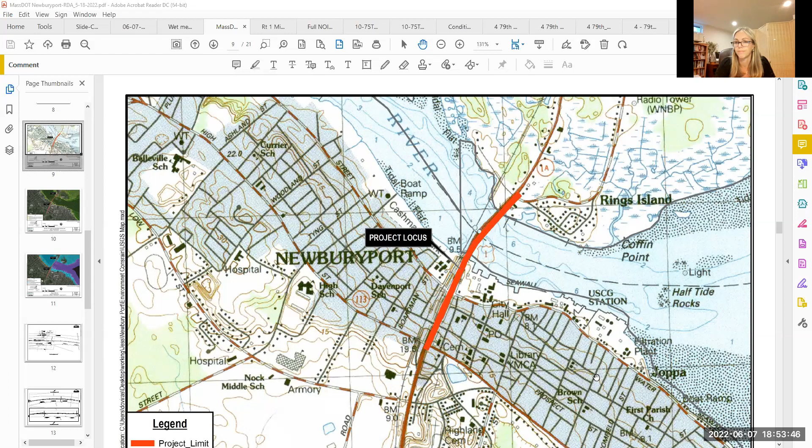So just to close, there's one portion on the Salisbury and one portion on the Newburyport side where we are proposing about 50 feet of a paved way that's currently a pervious surface. And again, that's to add connectivity to the existing shared use path to the proposed bike facility.

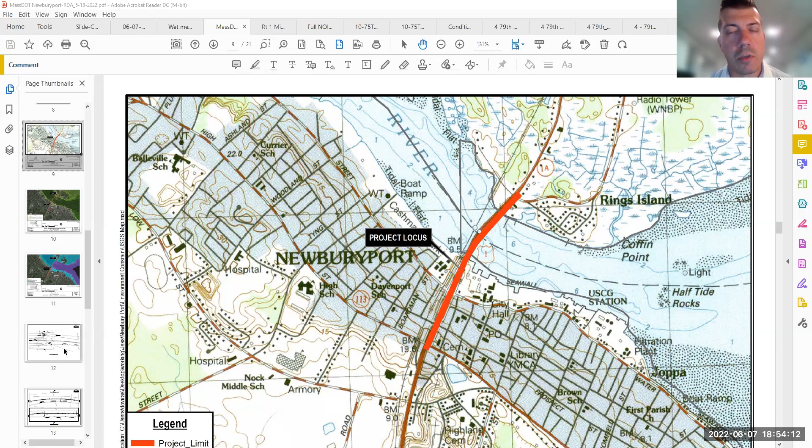Stephen, I can jump in here. Sorry that I had meant to present. I didn't realize we were going to start early. So I apologize about that.

I'm not sure if Stephen talked to you about this, but all the bicycle work is considered exempt under 310 CMR 10.02(2)(b) and the riverfront area regs 10.58(6)(b), except for the ramps that are going to come down off Route 1, and that work is not in bordering land subject to flooding, but it is in the riverfront area and in the buffer zone. It'll be on a grassy strip and join into an existing paved path. So the work will occur on an area that's currently grass, and erosion controls are proposed to prevent any sedimentation from leaving the work area.

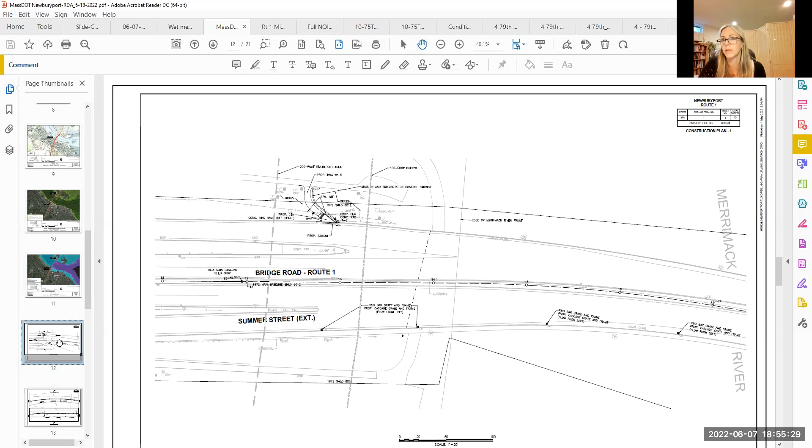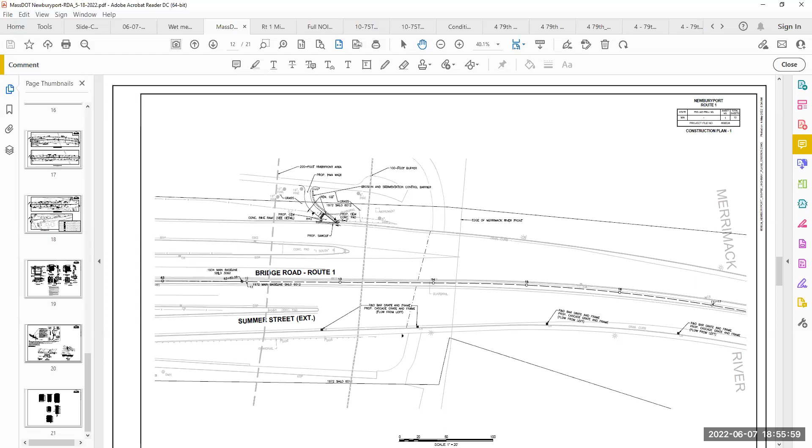Susan and Stephen, I've got all your plans and the RDA up here, but feel free to tell me to move to a different page or zoom in on anything. Well, you could scroll to the last page. It just shows the erosion control barrier. Maybe one down, Julia? Try 20. Yes, that one, exactly. So typically MassDOT uses compost filter tubes. They're a little bit easier to maneuver, and we've found that they work quite well in preventing any sediment from migrating.

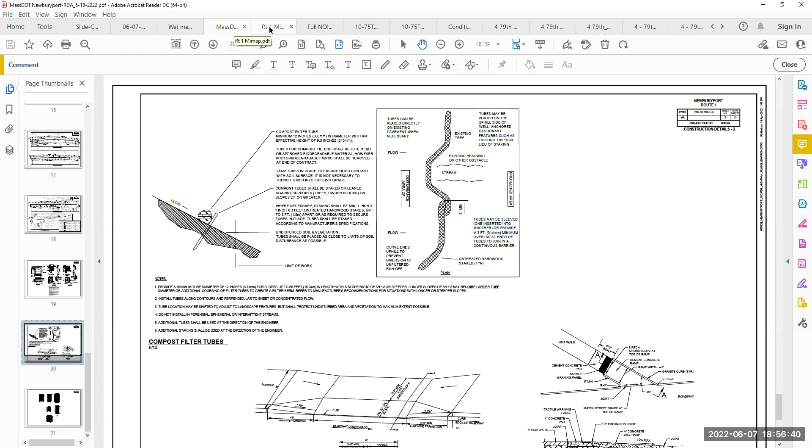And I think that's it. Stephen, did you want to add to when the project, you anticipate construction in the early fall? Yeah, at this point, the construction schedule's somewhat fluid. The program managing this work has several other locations that are scheduled. So it's really dependent on a number of things, but our best estimate at this point would be late summer, early fall.

And I forgot to add that the Merrimack is mapped as rare species habitat. That does extend onto the land a little bit. I believe the species is in the river, and they extended onto land just for added protection. But nevertheless, MassDOT has done a MESA checklist, and they're coordinating with Natural Heritage.

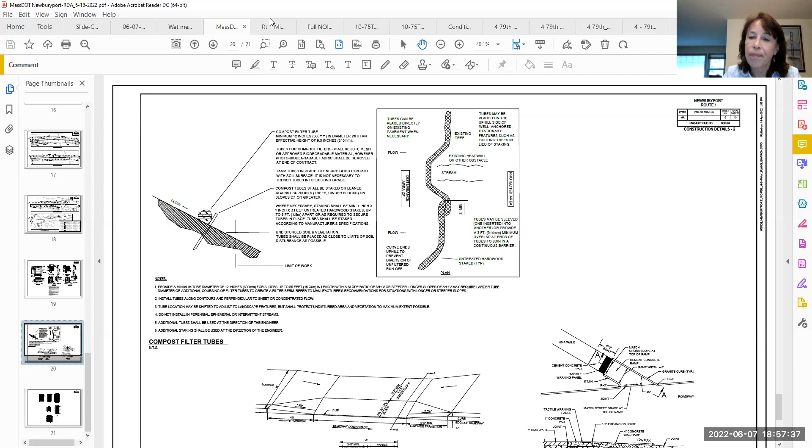Okay. Just for anyone who had a hard time with the plans and visualizing where exactly this ramp work is taking place, which I did, I pulled it up on my map as an aerial, so this might make it a little more clear. Correct me if I'm wrong, Stephen and Susan, the ramp from the bike lane onto the shared use path on land would be right around this area where these trees are shown. Is that correct? I think it's a little closer to that monument, closer to the water. Okay, so closer up here. Stephen, is that right? Yes, that's correct.

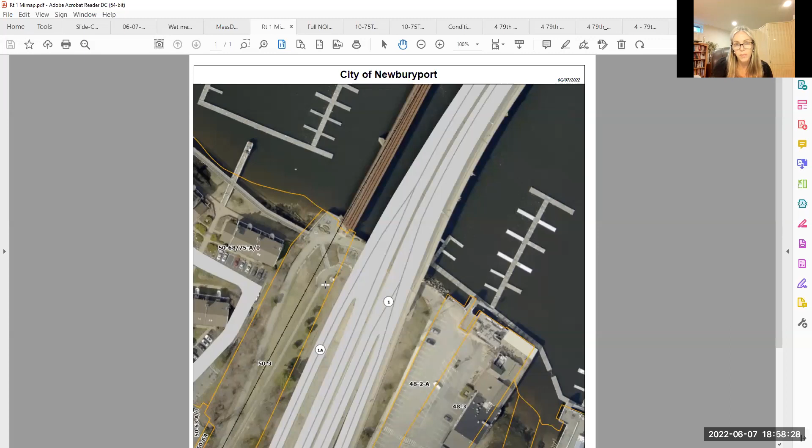Yeah, there will not be any impact to trees or removal of trees or anything along those lines. Okay, that's good to know, because on the project plans, it does look like you might have to impact the trees. Yeah, at this point, it's not anticipated.

So essentially, the Route 1 bridge is going to lose a lane on each side to traffic, right? So will traffic be merging before then? Just as a general user of the bridge, just asking.

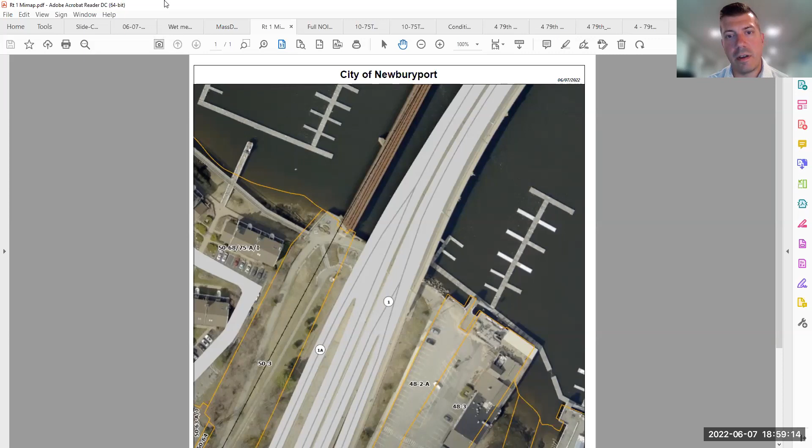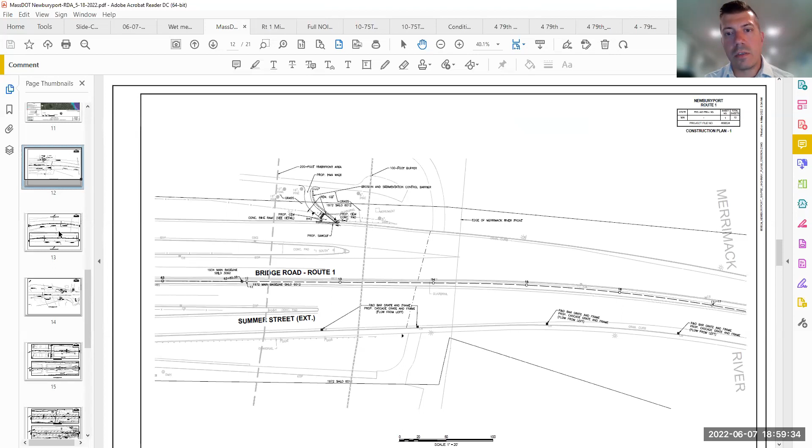Yeah, for sure. So the lane drop will begin the exit prior. So if you're traveling north, you have the Merrimack Street on and off ramp, and then prior to that, you have the Winter and Summer Street on and off ramp. So the lane drop as you're traveling northbound will occur at the Summer Street exit. The right lane will become an exit only lane.

The pavement markings will be modified back to that point, and there will be additional signage added, so it's clearly advertised it's an exit only lane. The left lane will be maintained as a travel lane. That one lane cross section will continue northbound, and then the bike lane will be picked up at the Merrimack Street on ramp, and then that travel lane and buffered bike lane will continue northbound into the Salisbury side.

Southbound, a similar setup. The one-lane cross-section, or travel lane rather, will continue to the Winter Street on-ramp. And one improvement that we're anticipating is where there is really minimal merging distance and lack of an acceleration lane for the Winter Street on-ramp. Because of the modification of that cross-section, that Winter Street on-ramp will now have its own dedicated lane where you will not be required to merge through traffic, and that two-lane cross-section will pick up traveling southbound.

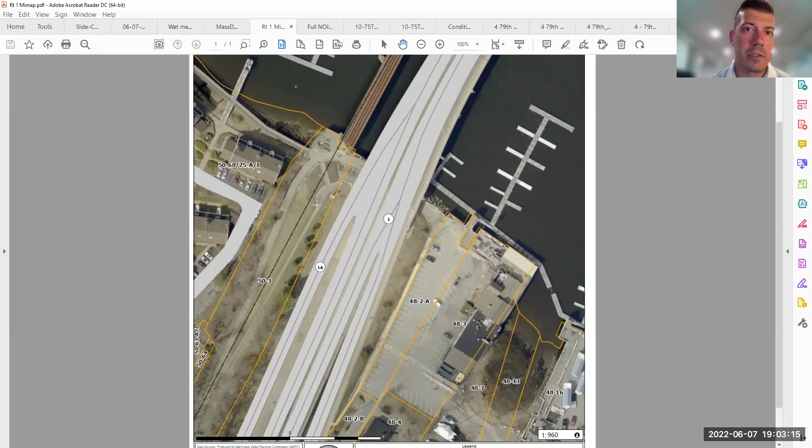Have you coordinated any of this with the Newburyport Parks Commission, or with Jordy Vining, the project manager for the rail trail? Seems like you're connecting right into the rail trail, and there might be some public accessibility issues to think about during construction. Yeah, Stephen, you can talk to that. Sure, I can speak to that. We've been in close coordination with Jordy from Newburyport and officials from Salisbury as well. We've solicited comments from both municipalities on the plans, incorporated the comments that we can, and have had an open dialogue. So yes, there has been coordination. Okay, great.

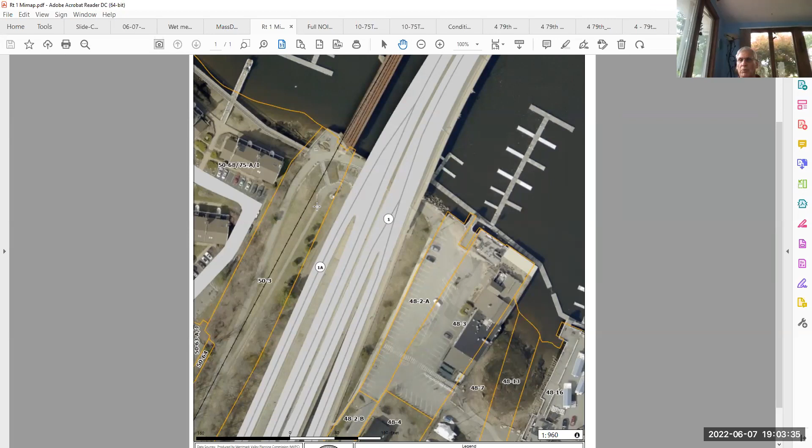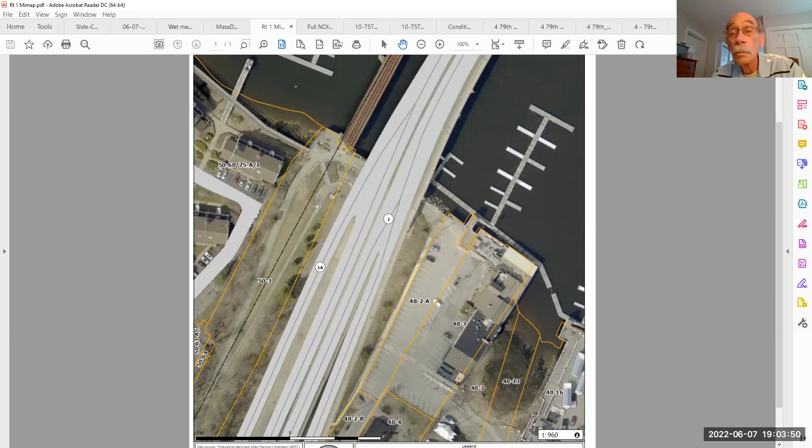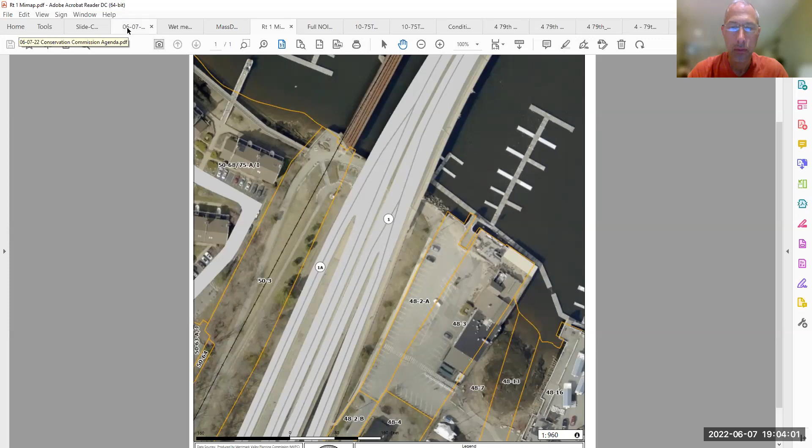Okay. Anybody else? No? Okay. Do we have a motion? Oh, public? No, this is a request for determination. Motion to issue a negative 2 determination. Second. All right, roll call. Paul Haley, yes. Dan Warshall, yes. David Vine, yes. And I vote yes. All right, thank you very much. Thanks, everyone. Okay, bye now.

Okay, can I get a motion to open the public hearings? So moved. Second. Roll call. Paul Haley, yes. Dan Warshall, yes. David Vine, yes. And I vote yes. First item is Raymond Kingman Jr., 10 75th Street, notice of intent.

Okay, let's see who we have here for this. Looks like we have Mr. Kingman, so I'll promote him to a panelist. It looks like we have Tom Hughes; I will also promote. And I don't know if Lisa Mead is here for this project or a later one. Lisa, you can raise your hand if you're involved. Good evening. Hi, Tom. Hi, Tom Hughes with Hughes Environmental Consulting.

After our last hearing, the commission had a couple questions, but basically we were waiting for DEP comments, and DEP commented that the house was riverfront, and we needed to address the riverfront standards. They also wanted some updates to the plans. This area has not been riverfront in 40 years, but it has become riverfront. So the house is in fact in the riverfront area. The mouth of the river extends further out, jetty to jetty.

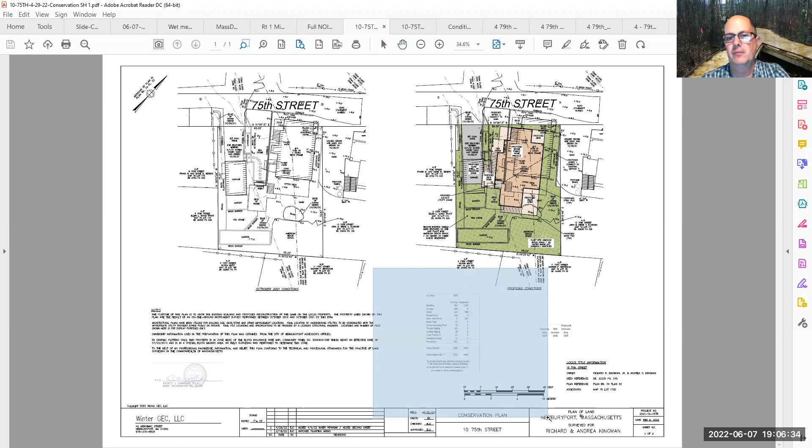So there's a couple things. One is we qualify under 10.58(5) as degraded riverfront. Currently, there is driveway, house, etc. And from the table, you can see we have a net reduction in degraded riverfront and a net increase in vegetation. So under 10.58(5) subsection F, we basically meet the minimum 1-to-1 standard. We exceed that, so we do comply with the riverfront standards.

The other thing DEP asked for was a clean version of the proposed plan without the existing conditions shown. That's the other one we sent in back at the end of April. These just hit the planning office at absolutely the wrong time when they were on a skeleton crew, so they didn't get out to you guys, which is why we ended up having to continue to this meeting rather than close out at the last one.

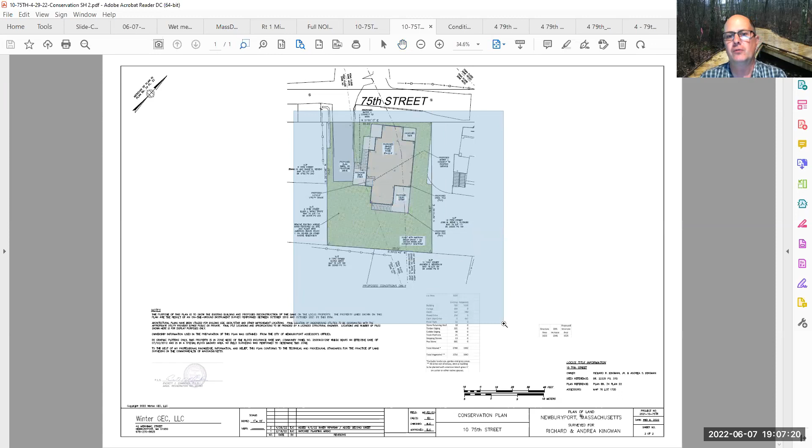So this is the clean proposal. It doesn't show any of the structures being removed or any of that. It just shows you, okay, here's what the site will look like when we're done. We have the driveway as far landward on the site as we can, to try to minimize any impact that the retreating shoreline may have on access in and out of the site.

Overall, I think we've been through this at the first hearing. It's a good proposal for a difficult area, and hopefully more of the remaining solid foundation structures go through this process. Mr. Kingman can correct me if I'm wrong, but my understanding is that as soon as this clears appeal periods, he does plan on pursuing the demolition of the structure. And then he's going to kind of wait out the Army Corps dredging and see how the situation plays out before doing the construction.

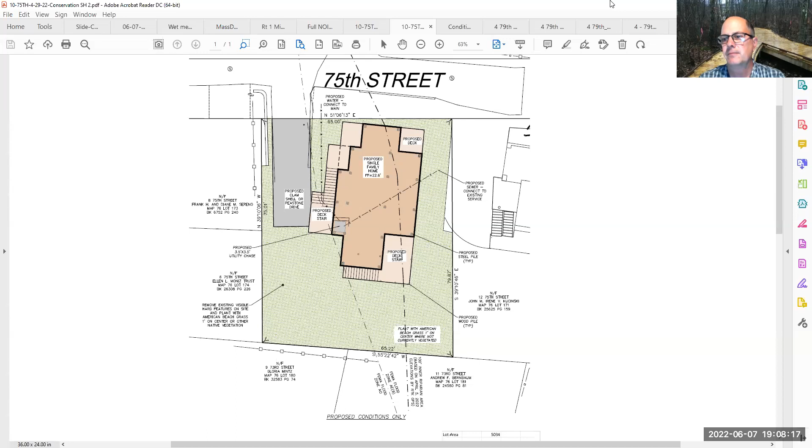Okay. Does the commission have any questions? Yeah, we've gone through this already.

So Tom, it will be all the outdoor space aside from the driveway will be planted. Yes, that's the current plan. I mean, we have enough unvegetated area that, it's possible, I suppose, we could come back later and try to amend it and throw in like a clamshell patio or something. But for now, this is what we're proposing.

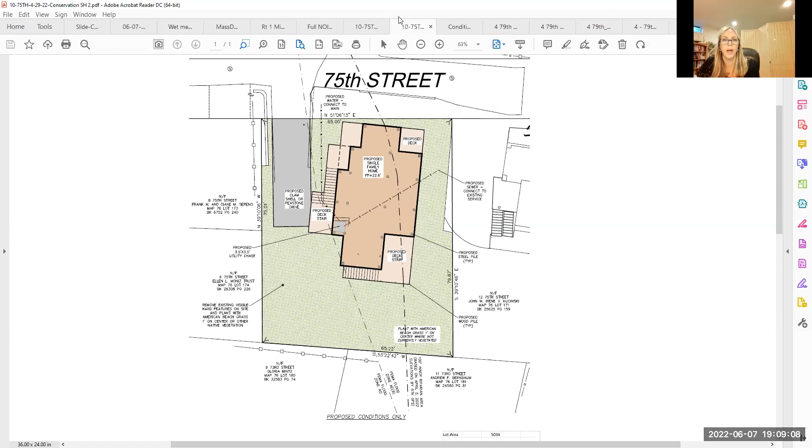And correct me if I'm wrong, can we go back to the other plans real quick? If you look at the bottom while you're right there, let me go back. If you look, you can see we're increasing vegetation on site by about 790 square feet.

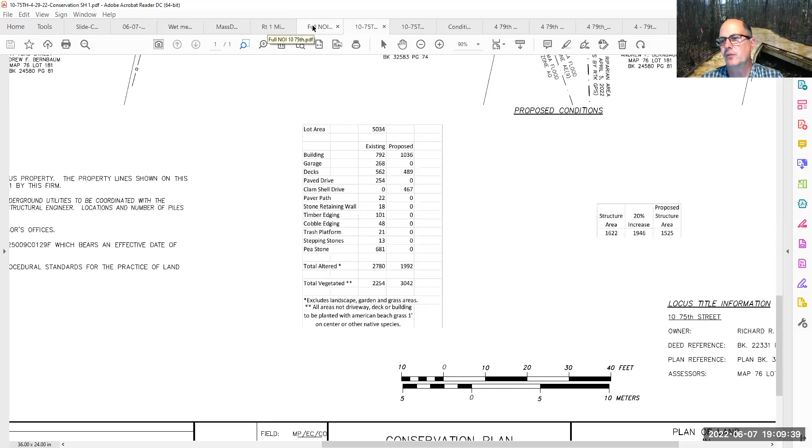So that's why we have plenty of room later if things settle down out there and it makes sense to do some outdoor space. Right now, it just doesn't with the dynamic dune situation out there. If you build a patio, it's just going to be under sand. Might as well get it all planted as well as you can.

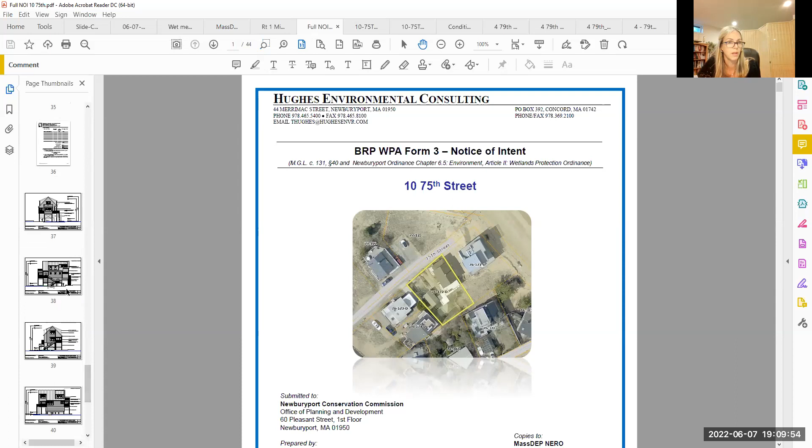Right, so my question was about the utilities and where they're going to be, the platform and that storage area. I just want to go back and review that on the elevation drawings. Because the neighbors, you remember we put their propane up elevated, and it's been important that it was. Where is that all going to be on here?

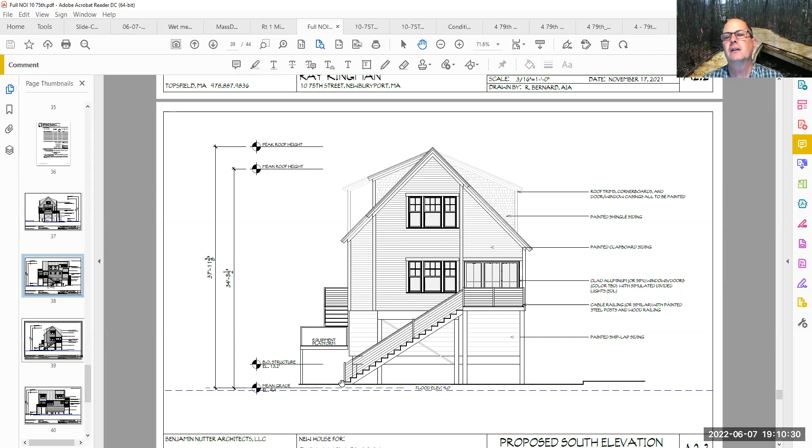So now you're stretching my memory. If you look, there's a mechanical space elevated up 4 and so many feet. There's an equipment platform there, which would be for compressor type things. If you look at the next slide, you can see there's an access to the mechanical area, which is shown at 4 feet, 4 2/3, or 4 3/8, 2 3/8 feet up.

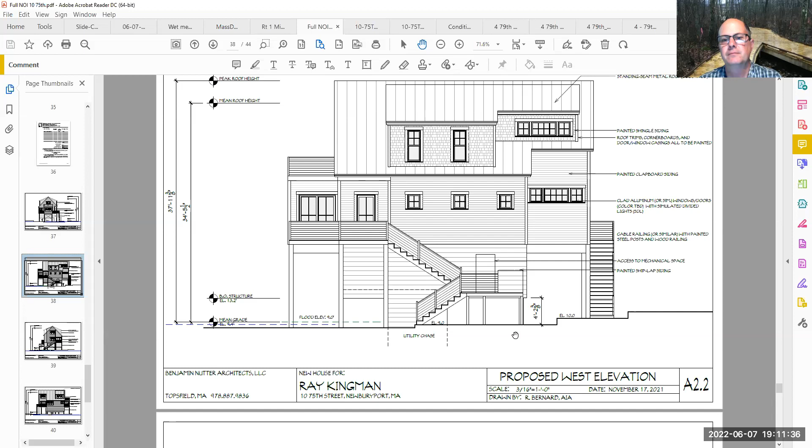Okay. Anybody got anything else? Hearing none. Anybody from the public want to speak to this?

Raise your hand. We will promote you. I am not seeing any raised hands. So what would we like to do?

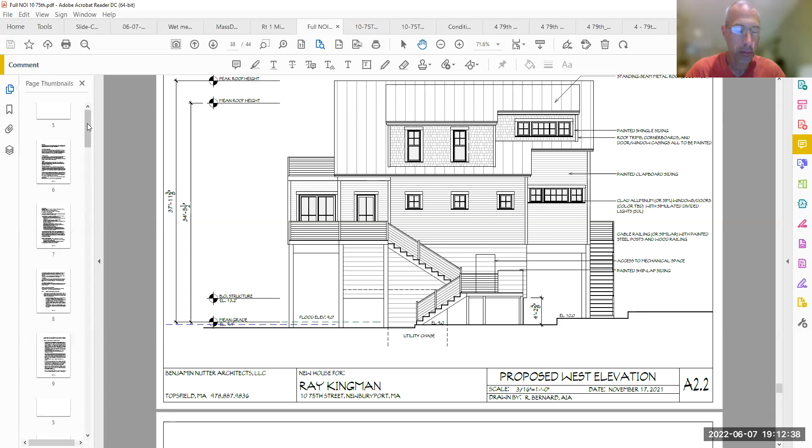Motion to close the hearing? Second. Okay, roll call, Paul Healy. Yes. Dan Warshaw, yes. David Vine, yes, and I vote yes. All right, thank you, thank you.

Next item is Robin Wallace, 4 79th Street, notice of intent. Okay, let me pull that one up.

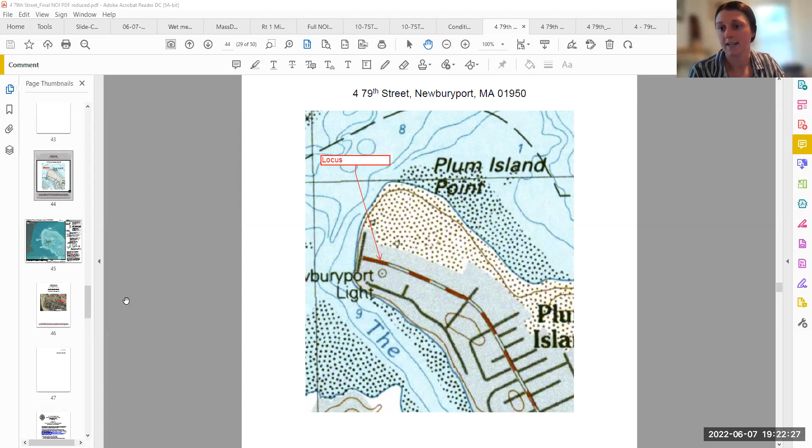Thank you, Attorney Mead. Devin Morris here from Hancock Associates, Project Wetland Scientist and Manager on the project you have before you today. It's nice to meet you all. We submitted this notice of intent to permit the redevelopment of the existing family home, which is a 2-story residence with an attic built in about 1947. Julia, if you could please pull up the plans, that would be phenomenal.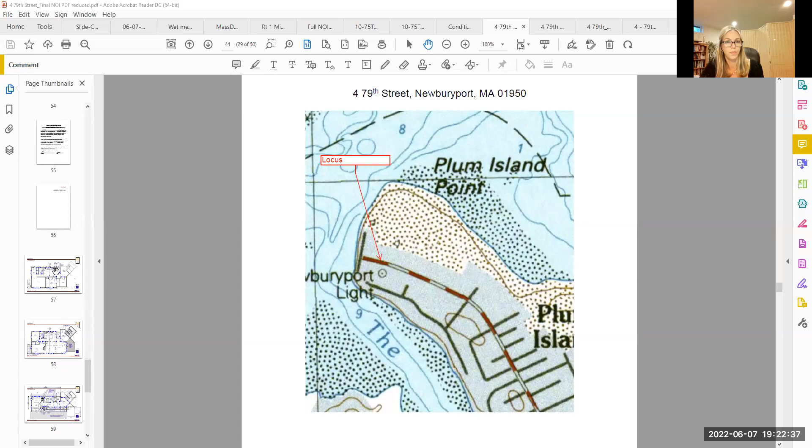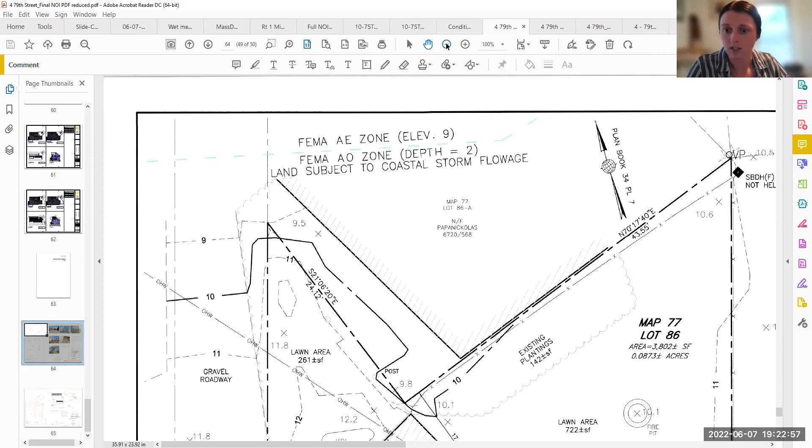While she does that, I'll go through existing conditions on site, which I'm sure you're all familiar with. Let's go to our existing conditions plan set, which also has photographs as well. Hoping that those came out clear for everyone to get a better understanding as to where we're at. Great, thank you, Julia.

So we are on a barrier beach, coastal dune associated with barrier beach, and land subject to coastal storm flowage associated with the flood zone mapped AO at a depth of about 2 feet. The FEMA flood zone lies between an AE zone and a VE zone. Located on Plum Island, barrier beach with densely developed portion of the dune system off Northern Boulevard.

Since the project is located on a barrier beach landward of the coastal beach, it must meet the performance standards under the Act, 310 CMR 10.28 and 10.29, and also the Newburyport Wetlands Ordinance. So the existing 174 square foot deck on the northern portion of the property that is currently over bituminous concrete will be removed for the proposed 134 square foot impervious addition for an elevator shaft.

Devin, is that in this area right in here? That is correct. Yep. Okay. Thank you. Yeah, I forget I don't have control, so I can't move my cursor.

So the existing first and second story deck and steps are going to remain in place. Adjacent to the existing shed is a koi pond, so just up a little bit on the right. Yep, exactly. Perfect. That's also going to remain in place.

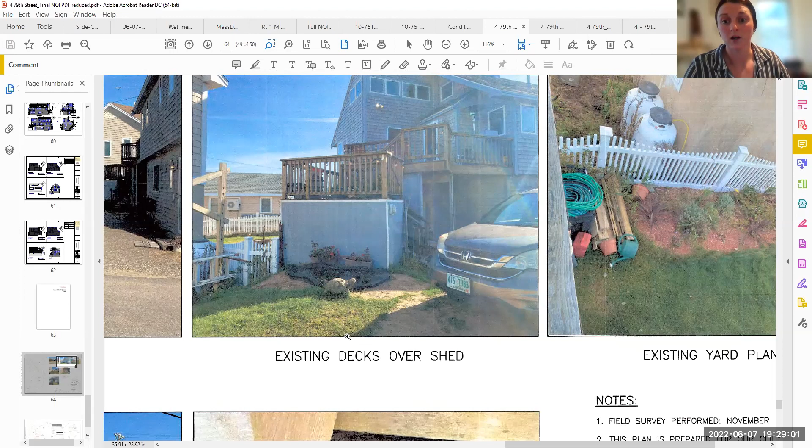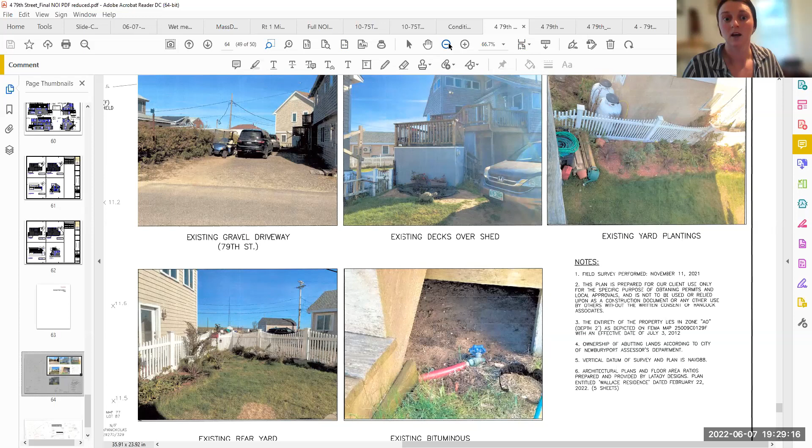So Barrier Beach, we go through a lot of the performance standards of the Act, and then also our compliance specifically with the AO zone, which I think was a large one that we had some questions about. The AO zone, which is represented as shallow standing water, is the result of the abutting VE and AE zones, whereas the velocity zones are the driver for the existing floodplain here. It's kind of a funky area. So we're not specifically in a V zone on site today.

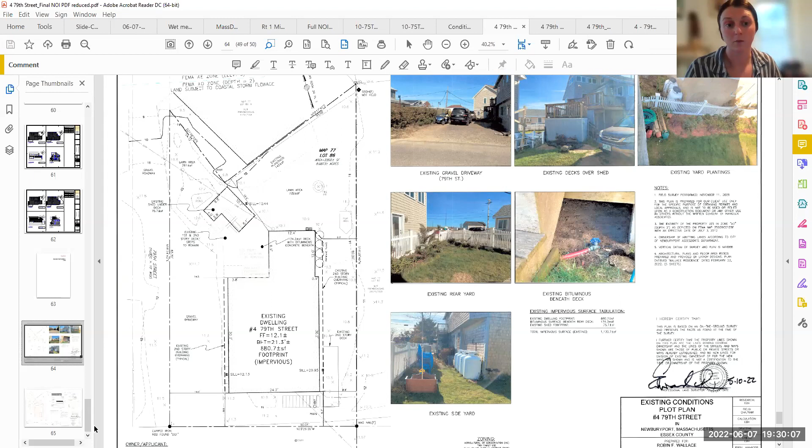Land subject to coastal storm flowage: under the Act, there are no set performance standards, but under the local ordinance 6.528 subsection B, we do want to run through how the applicant is complying with these performance standards. There are no structures or paving of new roads, driveways, parking lots, or proposed coastal engineering structures here. We're not within Natural Heritage endangered species or protected wildlife habitat as well.

And our main focus is to add the elevator for the applicant here. So with that being said, I'm sure there's going to be more questions in regards to the resource areas, but I'd like to hand it over for time's sake to Attorney Mead so she can go through our variance and alternatives, and I'll take it away at the end for mitigation.

Thank you, Devin. And so what I'd like to do is go through, and I submitted all of this in writing, so I'm going to briefly go through the ADA and FHA standards, but then in the alternative, I will set forth that we do meet the variance standards, I believe, and we have provided a thorough analysis of that along with the 25-50% analysis. So under the ADA, there's a 3-step determination to see whether or not the ADA overrides or allows the waiver of local ordinances, bylaws, or regulations.

And one is whether or not there's a disability, and then 2 is whether or not the accommodation sought is reasonable and necessary. And in this instance, we believe the accommodation is twofold. 1, to allow the installation of the elevator, without which the applicant could not access the property. And 2, to allow the construction of living space that would allow appropriate disability access and living space to meet the accommodated needs. We believe that the additional square feet of 93 square feet over the 25%, which I'm going to go into in detail, is a reasonable accommodation in this regard.

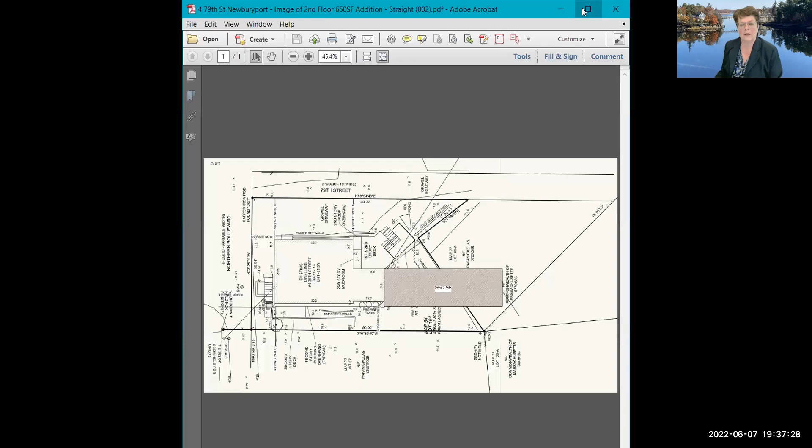Hold on, let me just make it bigger. Yeah, so this is actually an earlier one. We actually reduced it to 560 square feet, but it still does the same thing. So if you add the 560 square feet that are necessary onto the second floor, it actually doesn't fit on the lot. So it's not quite as long as this, but it goes into the second lot.

And then if you do it in a different configuration, do you have the other configuration, Devin? I think this is the only one I have. So the other configuration kind of filled in that corner there where it says first and second story deck, but it still went over into the second lot that's next door to this house. So the alternatives of putting it on the second floor don't work.

But in addition to that, putting it on the second floor would actually be worse as far as the commission is concerned, because it would add pilings where none are currently necessary, and it would cover a vegetated area, whether it's grass or not, it's still vegetated area, and it would not be a more beneficial alternative than the proposed alternative to renovate the existing third floor space in the existing footprint.

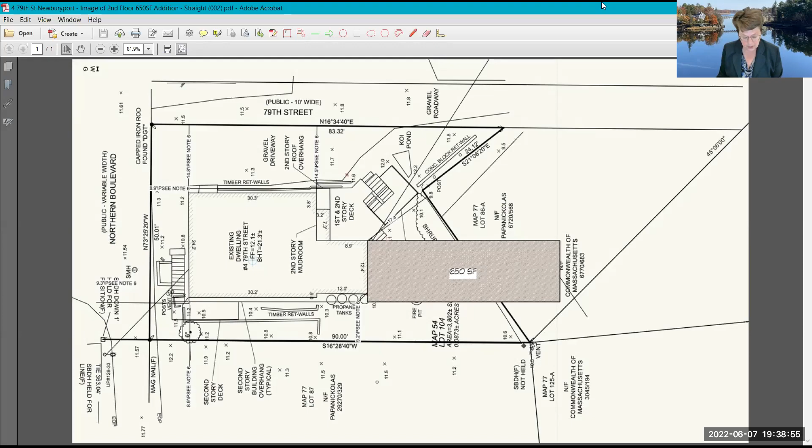So what are the mitigation measures? As Devin indicated earlier, she is proposing compensatory mitigation by adding additional native vegetation in the resource area. We provided 142 square feet. She's provided an extensive list in our filing and on the plans of what the proposed vegetation would be in that area, which would be native vegetation, which currently, as she said earlier, doesn't exist at all on the property. Thank you. Yeah, so 142 square feet.

So I chose some species that all of you are, I'm sure, familiar with. Salt tolerant pollinator species, bearberry, Virginia rose, beach pea, New Jersey tea, and then some American beach grass, I think would be appropriate here. I think it would really benefit the lot.

And in regards to our mitigation effort, we are looking at a net loss of 39.5 proposed impervious surface tabulation. So we are exceeding that required 1-to-1 mitigation, but more than that, 2-to-1.

So then the question, the last part of the variance requirement, is what is the overriding public interest? Here, there's an overriding public interest in allowing a person with disabilities to access and live in their home and enjoy their residence the same as those without disabilities.

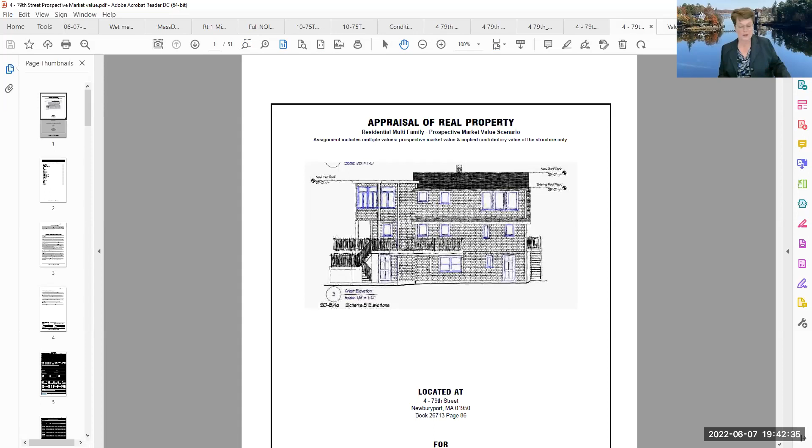Okay, where is the variance documentation? Is it somewhere in the 6 files that we have right now? I filed the variance documentation on Monday of last week in a cover letter dated May 31st, 2022, signed by both Devin and myself. And attached to it was the appraisal as well as Devin's updated plans. It's part of the appraisal package? Yeah, the cover letter is on top of the appraisal, but yes.

Yeah, in future, for Hancock's edification, we need these plans in one file, not in 6 files like we have now. Because I have no idea where any of this stuff has been put. So we filed it, Mr. Chair, a week ago Monday, and it's dated May 31st, in hand to you. And Devin also sent it in electronically with Mr. Story's appraisal and the certification that Julia reminded me about.

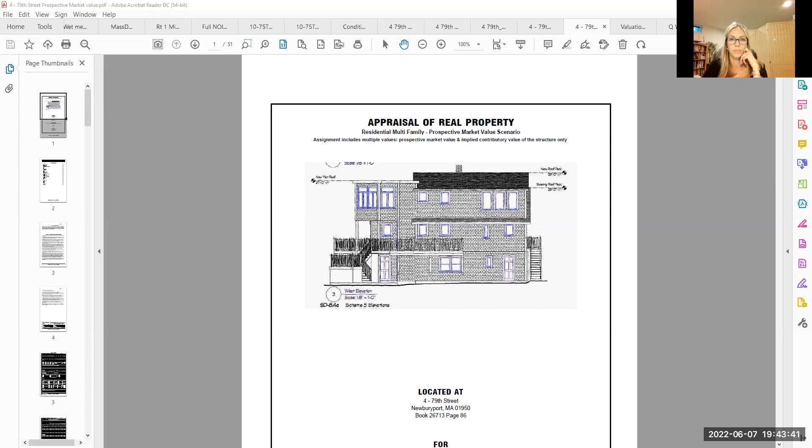Yeah, I'm looking for it. For some reason it's not coming up as attached. Yeah, I have a 5/31/22 final permit plans, but this might be it. There it is. Yep. So all the variance information is starting on page 4 of that final permit plan.

Right here. So here's where I would like to say, I think the crux of what you're asking is in this variance request. And I think it's important that the commission has time to read this. Has anyone else not seen this? David and Paul and Dan, have you guys read through this? I have not. Because these are the questions that need to be answered before I think the commission can make a decision on the variance as to whether or not these arguments are legally something the commission can go along with.

We haven't dealt, and I apologize, Lisa, and to the applicant, we haven't done this before. We've had one variance, I think in my memory, and that's been 10 years, associated with an ADA issue. And that was for an entryway at grade to get into an existing single family home. So it was to construct a new entry at grade. That was the accessibility, and the variance was granted for that at grade entry. This is a lot different than that.

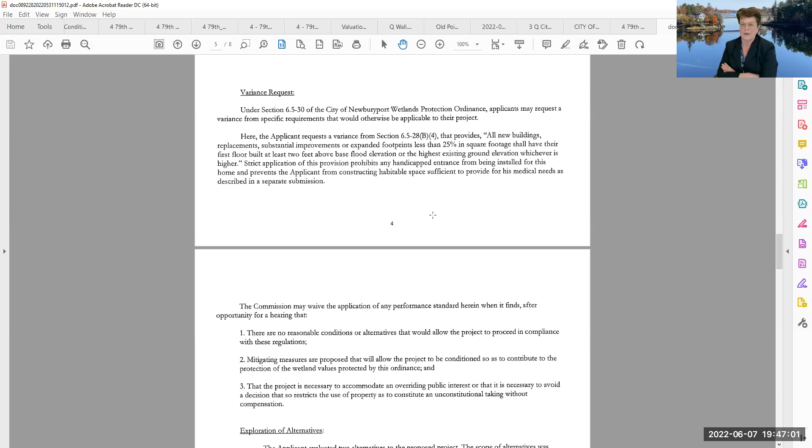So, first of all, I'm concerned that the commission didn't read the material. So it was 3 days later than the deadline. No, it was a week. No, I'm sorry. It was a week and 3 days later, Lisa. Okay. Yeah. So I am a little concerned about that. Time is of the essence here. And as I said earlier, both the ADA and FHA talk about delay. Now, I know that this is our only first hearing with the commission, right? So I get that.

But these are important issues, certainly for the commission to consider. But our variance requests essentially amount to 30 square feet. Well, in total, it's 93 square feet over the 25%, of which 63 square feet is attributable to the elevator and the construction of the elevator lobby entry area. So I'm not asking for a variance on the 25% that's 1,000 square feet or 500 square feet or even 100 square feet, quite frankly.

The other one is to allow the solid walls, if you will, of the elevator to be constructed at grade. And of course it has to meet the building code without question. This will be a pitless elevator. It will be lifted from the top. That is not an unusual construction methodology in someplace like Plum Island. So I understand that it's unusual, and quite frankly, thank God these requests are unusual, right? For a whole host of reasons.

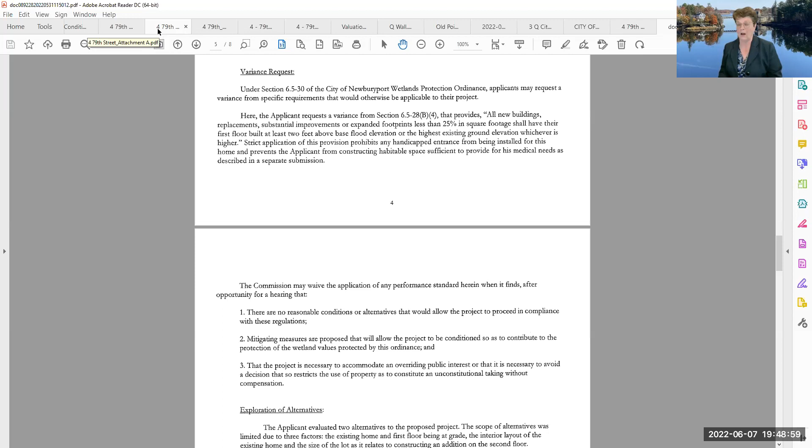And so I would actually like to hear a discussion from the commission. I think that if you would have read the material, you would understand the obligations of the commission, and even without those obligations under federal law, how we meet the variance requests. So I'd like to hear that. I'd like to hear any questions that the commission has, because I don't want to come back here in 2 weeks if we have to come back in 2 weeks, which I think is your schedule, right? 2 weeks. The 21st. Right.

So I don't want to come back in 2 weeks and have more questions. We can go an additional 2 weeks. So if we go 2 weeks, we're still within the appeal period of the ZBA, right? So we're not losing time. I'm capitulating, Julia, but I'm trying to get some buy-in here that we need to have folks look at this and ask questions and let us know what you need.

I just want to point out that the fact is, though, that if they haven't read this, it was a week and 3 days late, not 3 days late. It was over a week past the deadline. And we typically don't even open a hearing when we don't get all the required information by the deadline. So I don't appreciate the commissioners being told that they are somehow at fault for not having read through all of these detailed things that have come in late, including a revised set of plans. So let's just put that aside. Yeah. And I didn't mean to imply that, and I apologize if that's the way it came across.

Okay, we've been working with it for a while. So anyway, one thing I want to clear up here. I don't see a variance request anywhere in these 6 files that are available on the city website. I don't have a variance request. Julia just put it up. I know, but to read myself. Okay, and those are my files that, when you send it to me by email, I copy it into our file folder on the city's drive. And from there, it gets uploaded to the website.

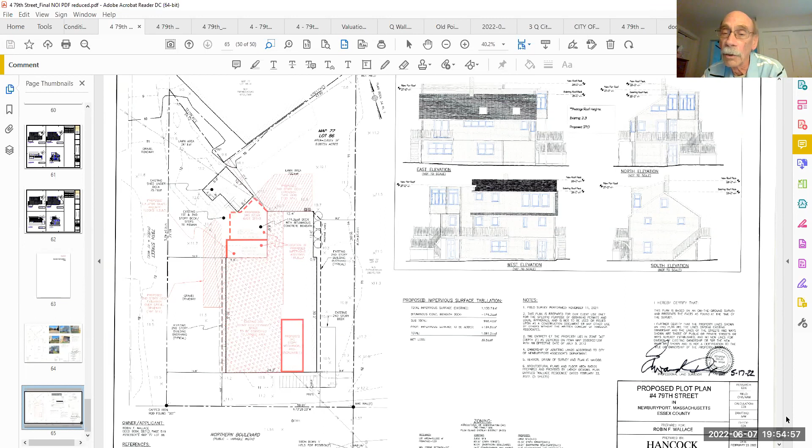Thank you. What about Dan, maybe? I'm not so sure that I find the public benefit in adhering to a federal law. I think they're two separate issues, public benefit and adhering to federal law. Now, if this is exempt from local ordinances because of ADA, then we don't need to issue an exemption.

Well, Dan, that's a really interesting point, because that was our position as well, that federal law allows the city to waive the local ordinances and regulations. There is mixed case law to say that you get that waiver from the regulatory authority, but it's a waiver based upon having a disability and whether the accommodation requested is reasonable and necessary. We only argued the variance request in the alternative because we were asked to, and I'm really trying to get this done for obvious reasons. So I put forward the argument, but it's our position that federal law allows a waiver of these local regulations, and in this instance they are reasonable. We're not talking about, to David or Paul's comment, I can't remember who made it, a huge lift here, so to speak. So that's our position, that we don't need a variance actually, but in the event you want us to go through that process, we think we meet the variance criteria. And it was the variance criteria, to Julia's earlier point, on your prior variance for access.

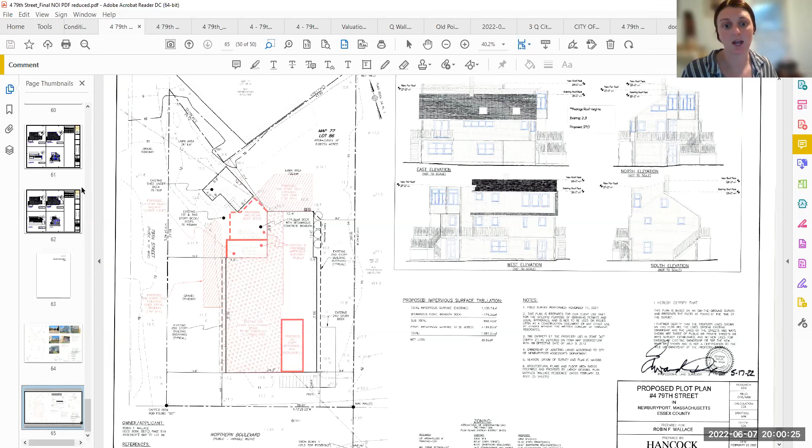And just to note, on Hancock's side of the plans, if there's anything else the commission wants to see, we'd love to just revise one set and get that to you, and hope to get an approval and issuance on an order of conditions on the 21st.

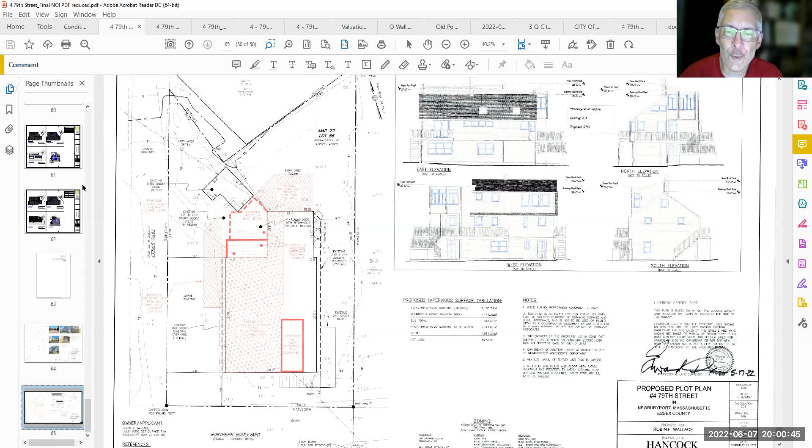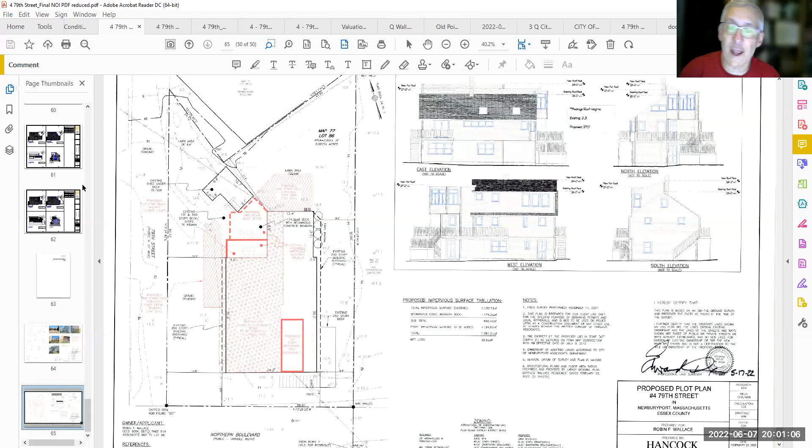One question I had - would it be possible to show graphically in the drawing where the actual shaft is? I'm seeing windows and a door and all that. Am I missing something where it shows the shaft in that east elevation on the left side there?

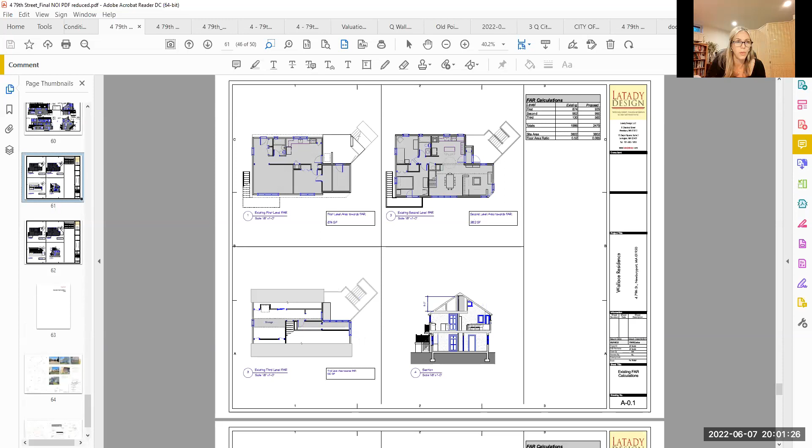I'd like you to look at the - Julia, do you have the full elevations, not just the ones on the site plan? Yes. I don't know which - hang on a second, because I don't want you to go up to the... those are existing conditions. No, could you get off that plan please? Could you move - can you move off that plan? Sure, thank you.

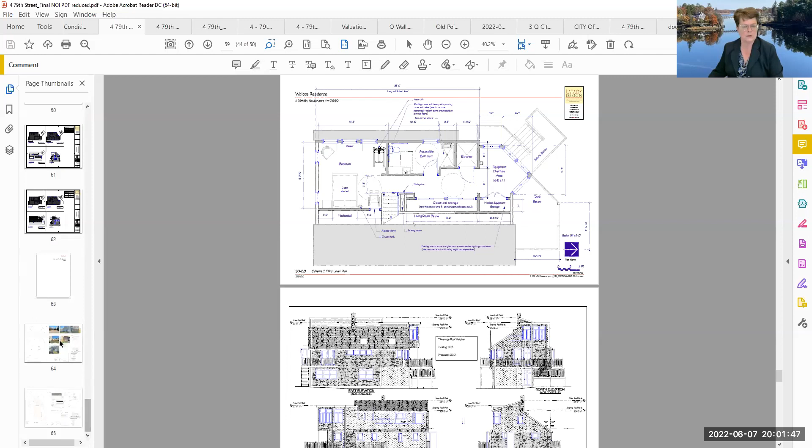That was in the private file that I sent to you. Oh, I'm sorry, that's all right. So in the site plan, in the floor plans that we originally filed with you, Joe, and in the elevations, it shows exactly where the elevator is.

In the floor plan - is there a plan that I can show? Hang on, the floor plans were the first plans at the top. No, I see the floor plans, I just wanted to see in relation to the rest of the building from an elevation, side shot - like where on here is the elevator? Do you have the elevations that were originally filed with these plans, not the floor plans, that were originally filed, not this revised set, but the old set of plans.

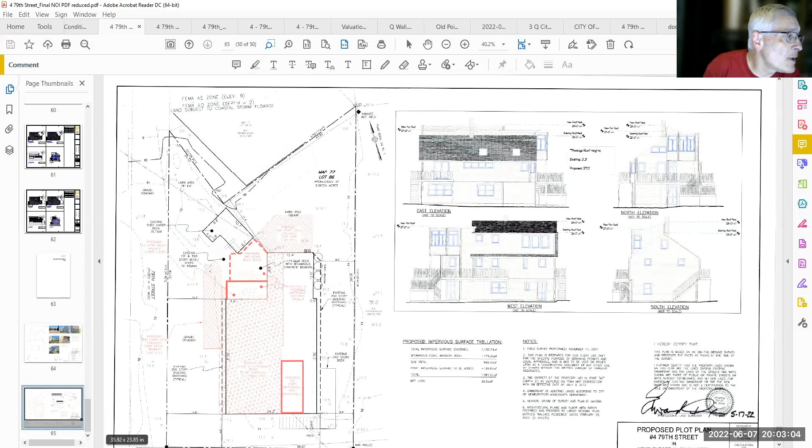Yeah, there's a set of elevations that are not on the site plan - they're the architectural plans, correct Lisa? Yes, not these though. There we go, or is it these? Yes, right, that's what I'm looking at right now. So you see on the bottom west elevation here, number 3, you see the door? Yeah, the elevator runs right up there.

So it's actually, I think you go in and take a right and it's right there. There you go. That's it, it's right there. Yeah, yep, I think that's correct.

It would be nice if we could make that clear on a plan, because it is kind of a really important feature. And is everything to the left of the elevator shaft, is that the addition?

On the third floor, yes. On the second floor, no, there's no additional living space. So this is all new on the third floor. Just the outside windows, those 2 right there, not all 3. Just these, yes, that's correct.

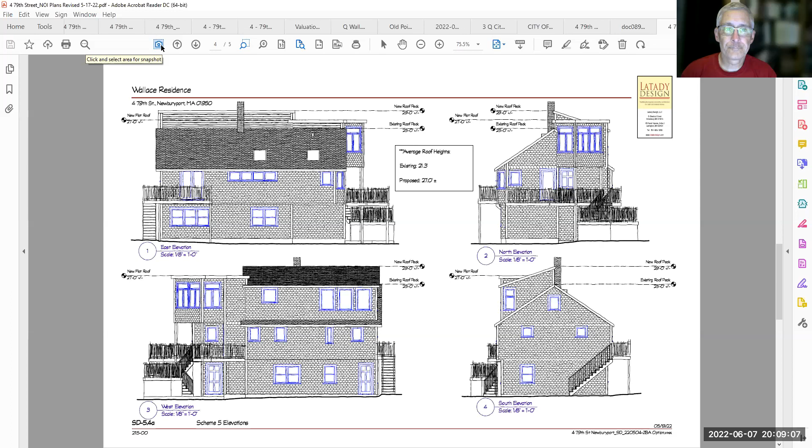Anybody from the public want to chime in? Raise your virtual hand. I see Kathy. Okay, let me see if I can help people unmute themselves. Kathy, you're welcome to unmute yourself if you want to speak.

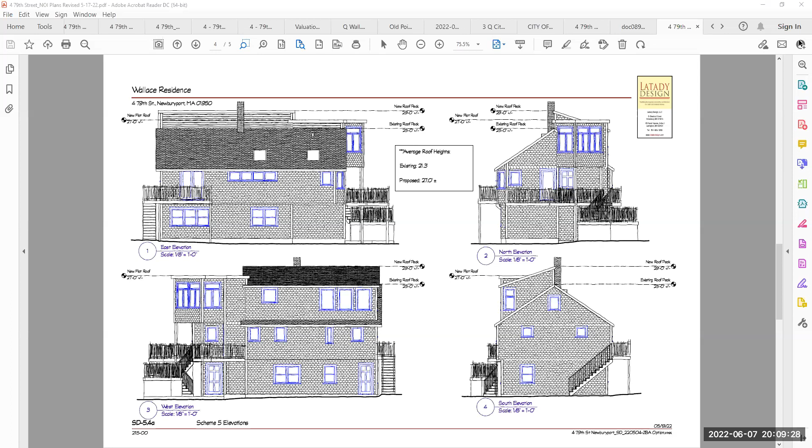We can correct anything that needs to be revised in regards to verbiage. Not a problem, Kathy.

Okay, so well, last week the mail truck couldn't get through 79th Street or 80th Street because they had them blocked. So where is the driveway then, if that's not the driveway? That's the black car in the street.

So what I can do, Julia, just to help answer this question, I think Devin has a GIS. Devin, do you have the MIMAP or the GIS you can pop up? I do, yep. Oh, you want to share, Devin? Yes, I would. Your request to share, please. Okay.

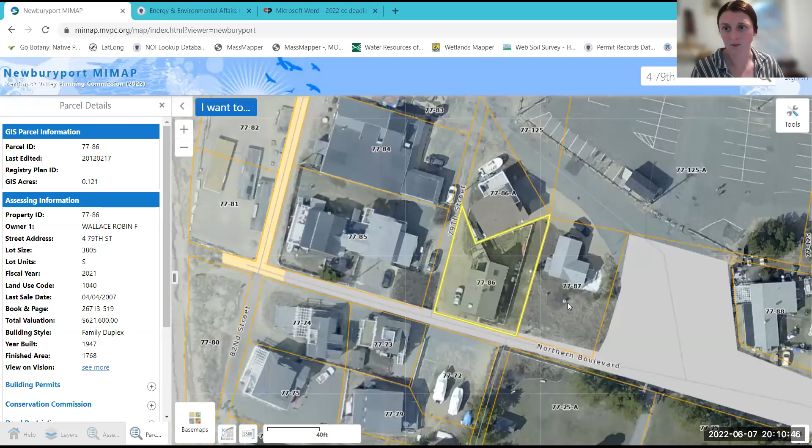Yes. So you can see 79th Street on the MIMAP. And our structure is that odd shaped lot there, right there, 77-86. So 79th Street, if you were to look at the picture that Devin had there, you can actually see you could park 2 cars side by side in that driveway. And then there's 79th Street beside that, which is blocked off because of that planting area right there. So, you know, this is not an atypical condition on Plum Island. Okay. But I just wanted to clarify that for the purposes of a comment.

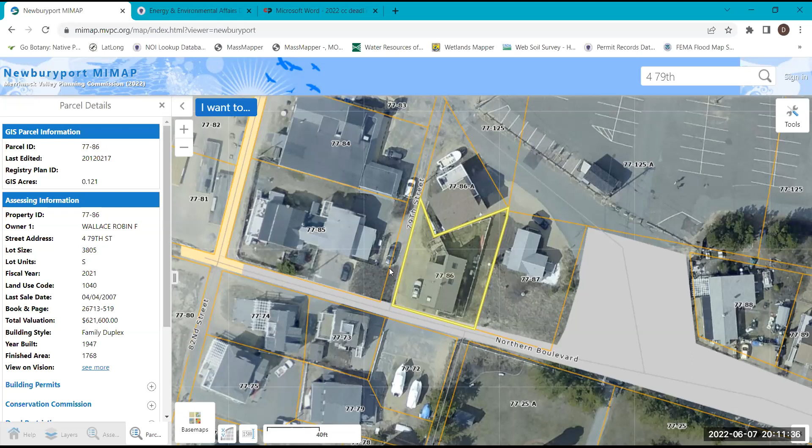Yeah, if you could go back to the Jeep picture, that actually gives it the real life look that my mom was trying to explain. By the way, this is Mike, her son. If you go back to that Jeep picture. What's your address? We're 82nd Street, so we are north of that property.

Okay, so my other question is, if they're gonna build a deck off of that structure on the right-hand side, their property, there's gonna need to be support beams and posts. And if they're gonna do that, how close should those posts be to a street? Especially in regards to wintertime, plows going by and so forth. What is the recommended space that's needed for something like that? I know this is unique and it's different.

It is unique, and one issue is with regards to what we have jurisdiction over here in the Conservation Commission. I'm not positive that's an argument for here, because we don't determine road widths and where they're placed and everything, so.

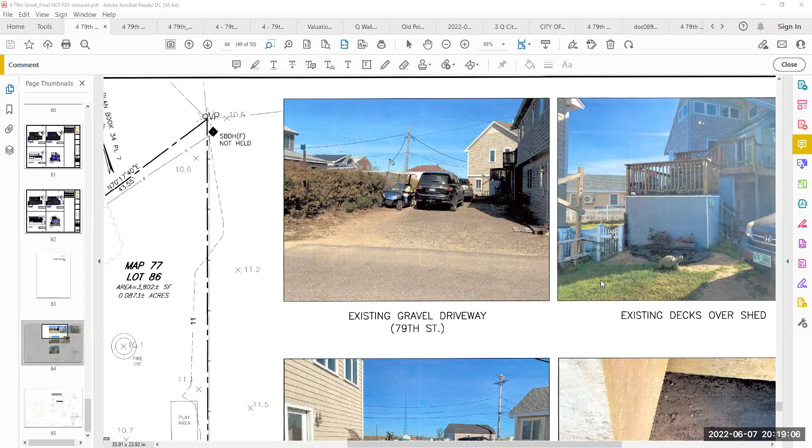It's 55 Reservation Terrace, if you didn't hear that. And I just want to say, I understand this is a very complex situation, but as an island resident and a neighbor, I support this application. I think it's important that people should be able to modify their homes so that they can stay in their homes as they choose. I understand it's complicated, but I do support it, and I think it's a fair reason to request something such as a variance. Thank you. Okay, thanks. Anybody else?

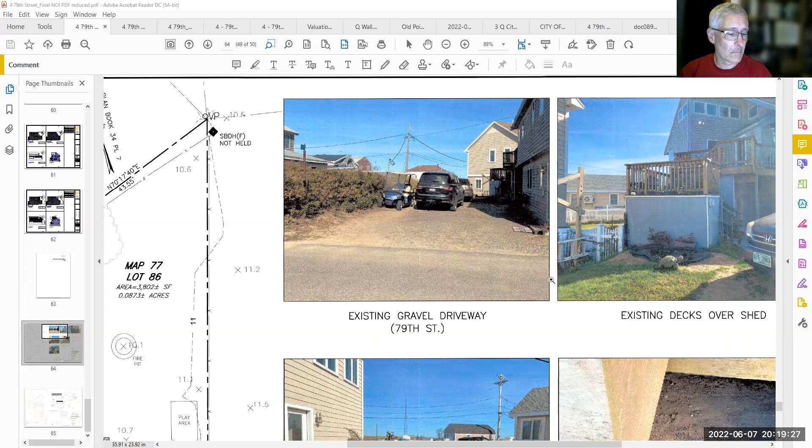Not seeing anyone. I think we're thinking about continuing this to the next meeting, so we can go over the paperwork and get some updated plans. Does the commission have anything else tonight? And can we give you those plans a week from today, or do we have to have them by Friday? No, a week from today would be fine. As long as it's a week prior. Once the hearing is open, supplemental information requested by the commission needs to be in a week prior to the next meeting. Thank you.

Okay, so commission members, what do we want to do? Do we want to continue? I think we want to continue. Yes, I'll make a motion to continue to the next meeting, June 21st. Second. Roll call: Paul Healy, yes. Dan Warshaw, yes. David Vine, yes. And I vote yes. Thank you. We'll see you in two weeks and we'll get you that information.

Okay, all right, thanks. Thank you, commission members. It was nice to meet you all. Have a good night. You too.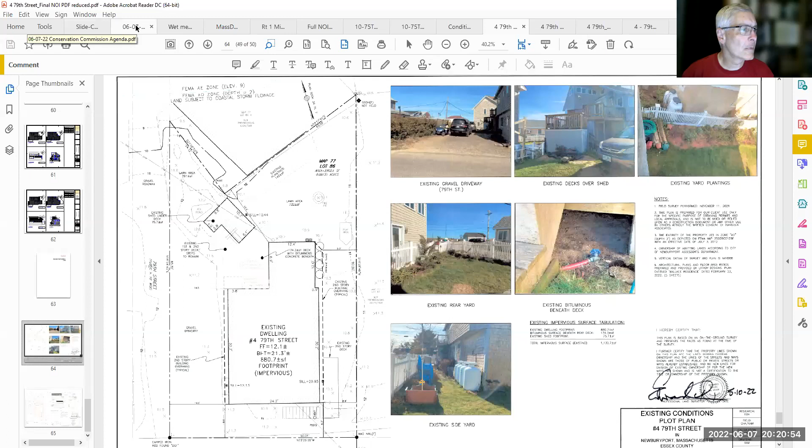Can I get a motion to close the public hearings? So moved. Second. Roll call: Paul Healy, yes. Dan Warshaw, yes. David Vine, yes. And I vote yes. We have one order of conditions, yes? Yes, that would be for 10 75th. Yep. One special condition that I talked with Julie about is making sure that the applicant is aware that if the site conditions change significantly, they would need to come back in for an amendment.

But just have that as a special condition. So this is the draft special conditions for that project, going through standard pre-construction, during construction, and then special conditions. We could add that in here under the special conditions. I already put in one, which would be: immediately after demolition of the existing home, all demolition-related debris shall be removed from site and properly disposed of off of Plum Island. Any voids in the dune may be filled with beach grade sand to level the area if necessary.

And then we could add one right underneath it. Joe, what was it? You want to put that into words for me again? Basically, it would be close to your last sentence in the notes. Make sure the applicant's aware that they may... Oh, right. If conditions should change between demolition and prior to construction, the commission may request updated plans reflecting those changes in site conditions.

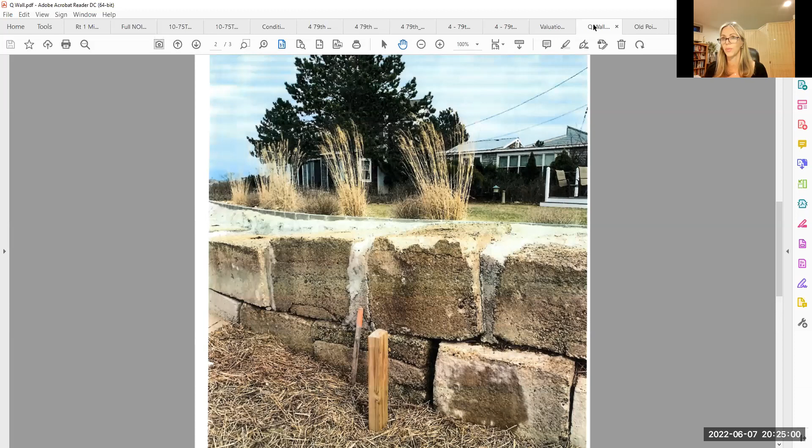Last but not least, enforcement violations, 3 Q Street. Okay, here we go, back to 3 Q Street and the wall. Did you all receive the letter that I drafted regarding the lifting of the enforcement order? Yes. I didn't have any issues with it. I thought it covered well what the situation was out there, and the fact that we're going along with the additional engineering judgment.

Let me pull it up. I have it. Put it on here. Here it is, the enforcement order release form. Okay, so anyone have any changes they would want me to make to this other than adding in today's date? No, I thought it was good. Okay, great. You could vote on this.

I just also wanted to make note that we did receive a letter today from the mayor's office. See if I can find that one. Yeah, I had several conversations with them about this, as well as DPS. They took a look at it, and they took a look at the letter from Lisa O'Donnell and put together this letter. I also got an additional email from Tony Fernari saying that he was fine with it. Okay. Well, this letter changed my vote.

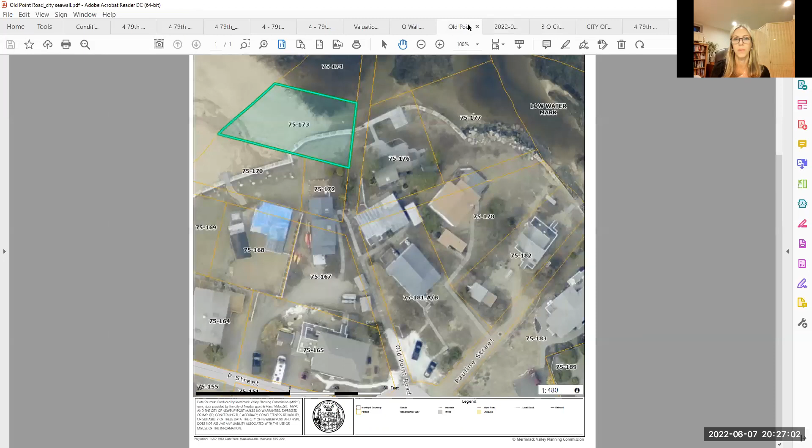All right, so what do we do? So now what you would do is vote to issue the, let's see, I just had it open. It was the enforcement order release form. You would vote to sign this enforcement order release. And is this an ink signature? No, this can be done electronically as well, because we went through that process with the registry, you guys all had to come in and sign that document, and now they can accept these electronic signatures continually. Oh, okay.

Paul, motion? Oh, no, there's one more, sorry. Yeah, there is one more motion that Paul needs to make. Okay. I'll make a motion for the commission to issue this release of the enforcement order. Second. Roll call. Paul Healy, yes. Dan Warshaw, yes. David Vine, yes, and I will vote yes.

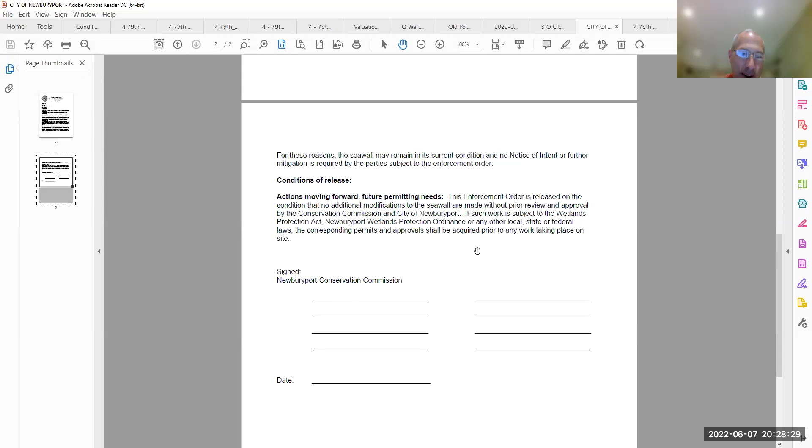Wow. Yeah, when I go down into the basement of City Hall and pull out the oldest ConCom files that we have, your name is on them, Paul. Yeah, I know. Yeah, that was a long time ago. Good. It's comforting, I tell you. Yeah, no, things have changed a lot in that period of time. Yes, they have. Seen it all. You're gonna break the record, Joe? Am I? Break Paul's record? Go for it.

What did I say, Paul? Let's see, when you started, I was like 26 and I would have to be 81 to stay on as long as you. You can do it. Yeah, well, I don't know. My family history does not tell me I'm going to be around at 81. Uh-oh. At least my immediate family history. Oh, right. You can beat that.

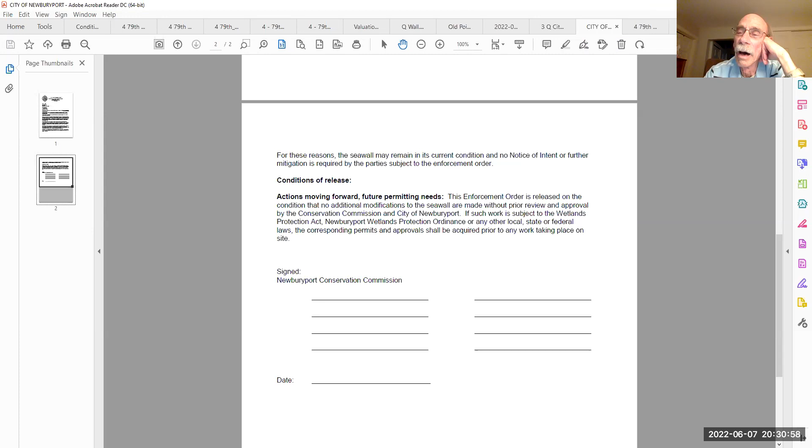I do want to ask, are you going to come to a going away party, Paul? I don't know. We can talk. Yes, we need to talk. We are going to need a new CPC associate. Yes. The CPC, Community Preservation Committee, wants to be part of any farewell for Paul too. Okay, shall do. Now, as far as CPC is concerned, you guys decide which of you wants to be the next member, suggest that to the mayor, then it goes through the regular cycle. But it starts with you guys. Yeah, and then city council has to appoint, but we have to elect whoever's gonna be part of it.

And it is a very fun job. I would give it a good recommendation. Well, you seem to like to do it. Yeah, and it really comes down to about 6 meetings a year. So it's not too bad, but it's just such an interesting process, giving away money. And how quickly everybody reaches agreement. That's good. It's like us. Yeah, right.

So I'm gonna attempt to, we'll coordinate something. You will need to give me some dates that you will be available, so I can circulate that amongst everybody, and then we'll figure out where we're gonna go. Right. And I can communicate with others at the planning office about the CPC group too. Okay. Well, you guys have a good time. Sure you don't want to come back for another few meetings? Do you have an end date, or was this it? This is it. Oh, all right.